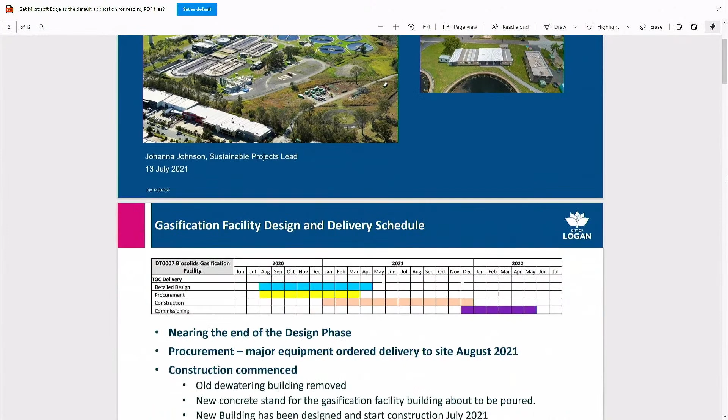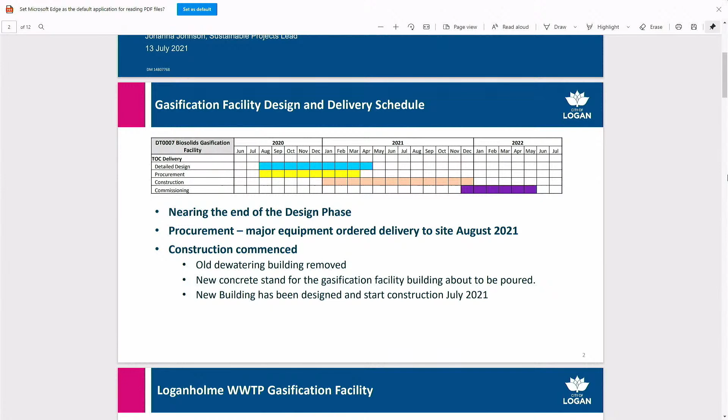We're well and truly into the construction phase at the moment. Our major procurement is underway, and some of the significant items are being transported towards Loganholme at the moment. So the centrifuges are on site, and if we can just scroll down, we can see that that's the area.

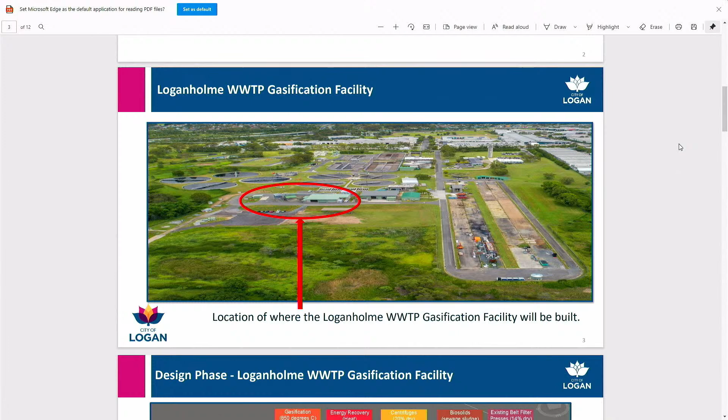So that's an earlier photograph of Loganholme. That's the area that's being cleared for the gasification facility. If you keep going - I won't take you through that unless any of the councillors would like to hear about it, since we've taken you through that before. That's the process that we're going through.

So we're taking the wet sludge through. It goes through a centrifuge, then we've got a drying step, and the gasifiers at the end. I suppose the trick of this is we're using the heat energy from the gasification process to put that into the dryers, and that's something that's never been done before.

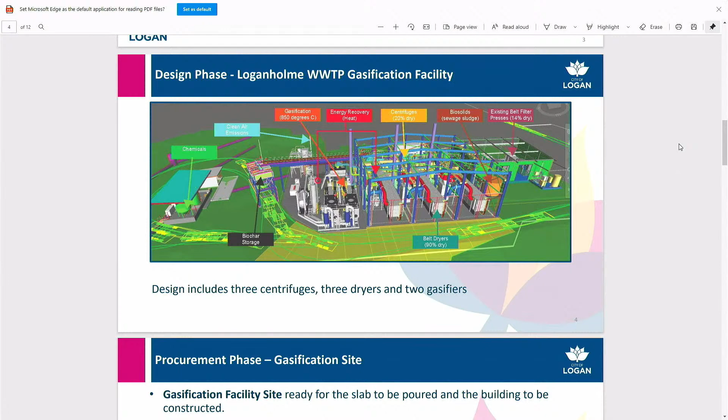So I'll now get to some of the photos that we want to show you. So we're getting ready, that's the site. That's all been cleared, and that was done by a local demolition company.

The next photos are of the dryers. So these are really large dryers. We sent out a link, I think, in one of the council updates a couple of weeks ago.

So for those of you who have been following it madly, the ship is currently off the coast of West Africa, coming down that way. So we're trying to work out whether it's going to go through the Suez Canal or not, but apparently it's quicker to go around Africa, and it's on its way here.

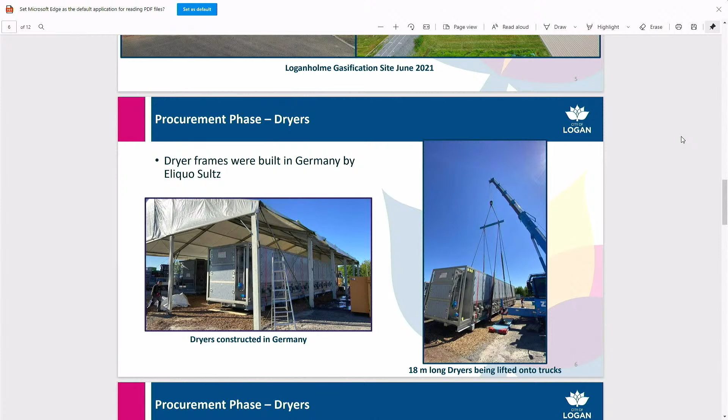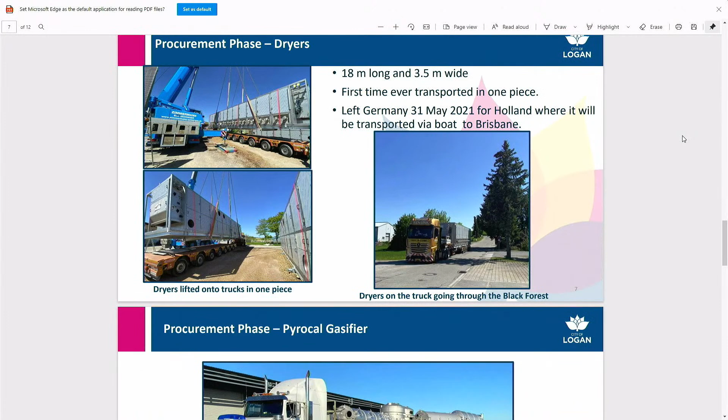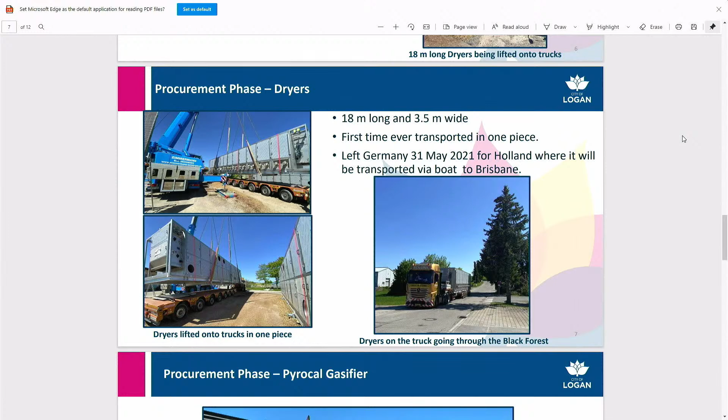So these are the dryers coming out of Europe. If we go to the next phase, they're being transported. As it says in the slides, it's never been transported in one piece before, but we worked out with the supplier that with the long travel times, it made more sense to actually transport it as an assembled unit all the way down to Australia.

So Pyrocal, this is the operation out of Toowoomba that has the expertise on the actual gasification units themselves. They're being fabricated at the moment. We're expecting to see them on site around September. And if you keep going one more slide.

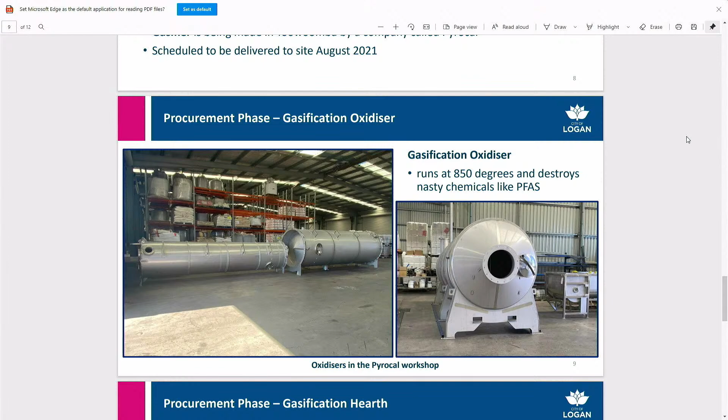So they're on their way to Loganholme as well. Probably got a couple more slides, you'll keep rolling past that.

So finally, the next steps. The major components are going to be arriving and we'll start assembling those in August, heading towards us being able to start the commissioning phase of the project in late December, then through to next year. Hopefully early next year we'll be making biochar, and we'll be looking for a viable market to sell that biochar. That's something we're really excited about.

It's looking like we'll be able to take something that was a waste product and actually be selling it at the end of this process. So a really good step forward for Logan Water.